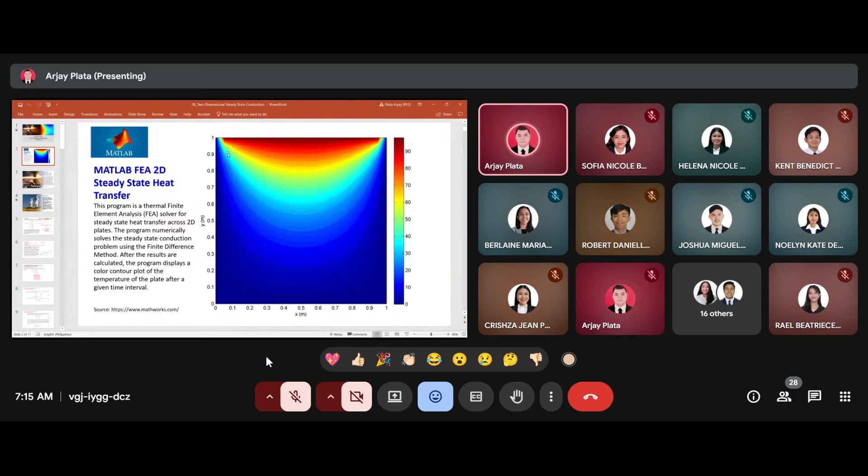Same as earlier, so this is the kind of output MATLAB gives us. We have the X direction and also the Y direction. This is the temperature profile from 0 going to 90.

Does anyone have an account on MATLAB? I mean, do you have an account on MATLAB? It seems our license has been renewed, so you can use MATLAB using your GSOT account.

You can use the finite difference method in solving conduction heat transfer problems. So this is the output we get with regards to the temperature profile.

Another way is through ANSYS. Usually we use ANSYS for transient conduction using ANSYS Mechanical.

As we all know, time plays an important role in heat transfer. Any heat transfer phenomenon takes some time to reach a steady state. As I mentioned previously, in reality at the beginning it is not really steady state, the heat transfer is still fluctuating. Then as time goes by, it becomes steady state.

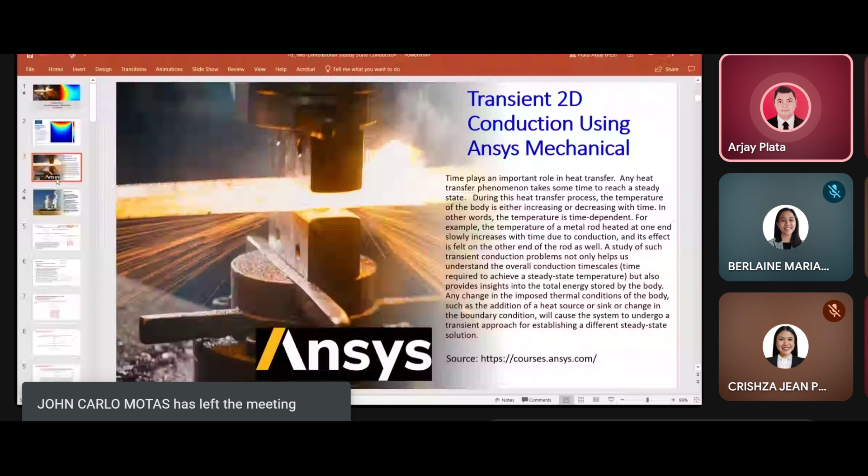And so you can use ANSYS Mechanical, it's also available online. So I just introduced some of the softwares that we can use in solving a two-dimensional conduction problem.

So for today, our objective will be: first, to review alternative approaches to determining temperatures and heat rates in a two-dimensional steady-state conduction; to consider some of the mathematical issues associated with obtaining an exact solution; and to show how, with the aid of a computer, numerical finite difference or finite element methods may be used to accurately predict temperatures and heat rates within the medium and at its boundaries.

Okay, so that is our goal for today.

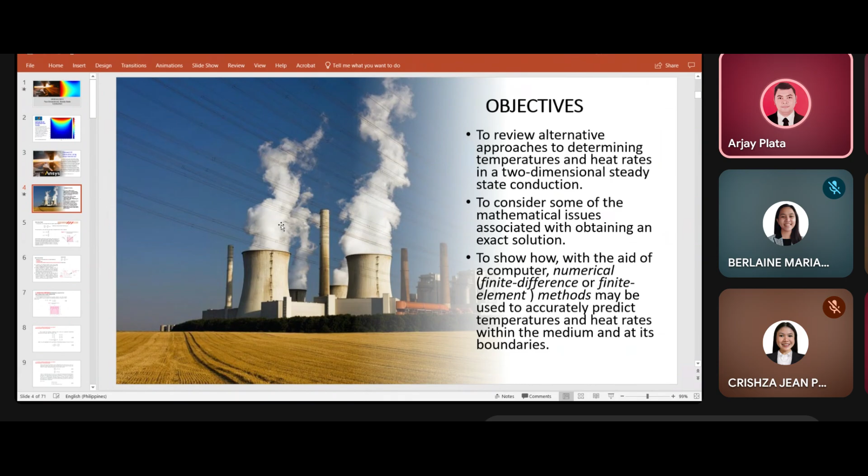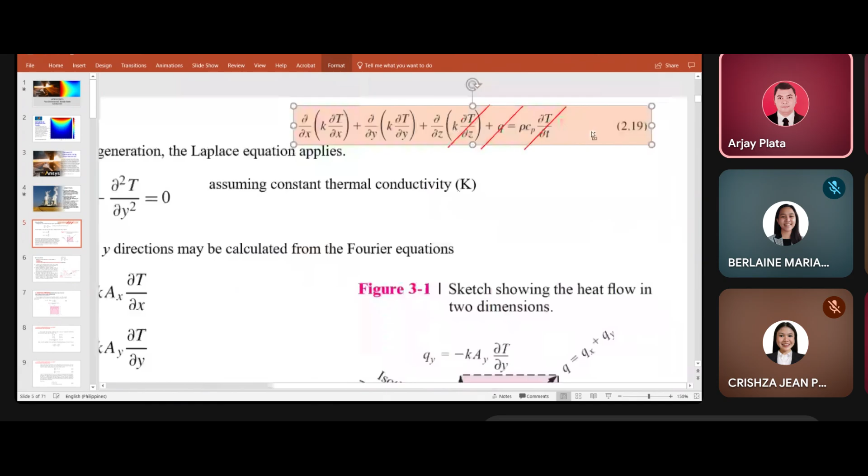In a two-dimensional case, as I've said, we have two directions, the X and the Y, so we have no Z direction. By the way, what you see on the screen is our diffusion equation that we previously derived. As you can see here, we have no Z, so we delete the Z direction. We have heat generation and

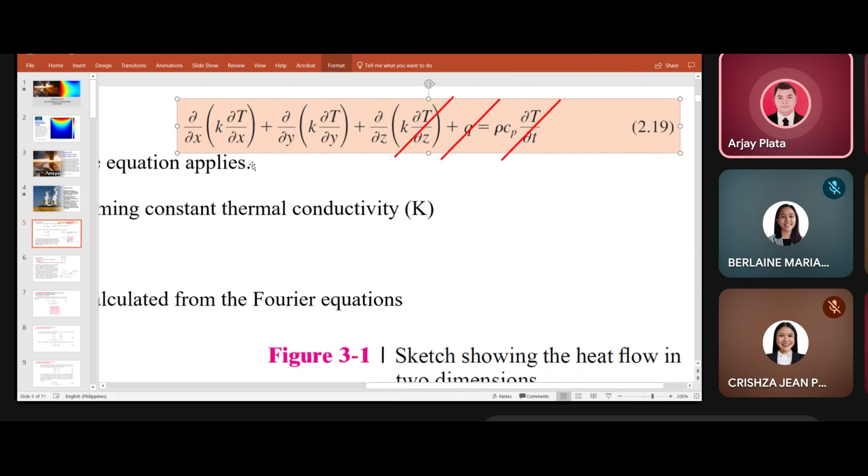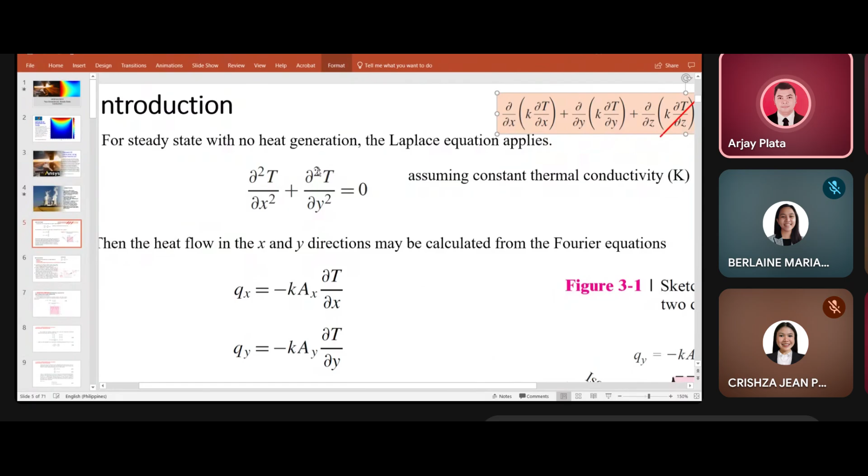energy stored, so what we only have is conduction in the X and Y directions. So our resulting equation is a Laplace equation that applies, assuming constant thermal conductivity K: partial squared T over partial X squared plus partial squared T over partial Y squared equals 0. This is our working equation.

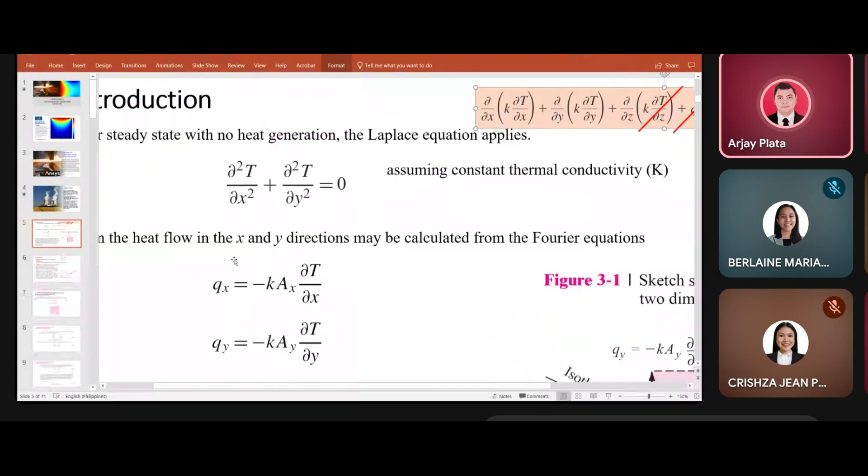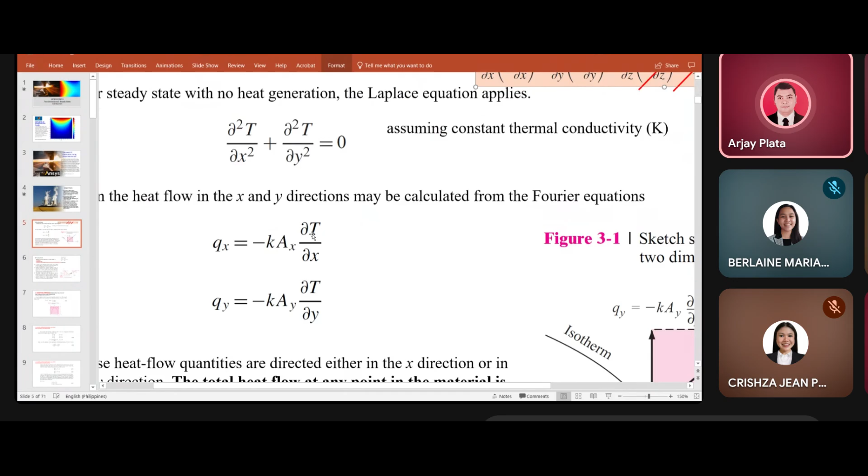Then the heat flow in the x and y directions may be calculated from Fourier's equation. We have Qx equals negative K times A times the partial derivative of T with respect to x, and negative K times A times the partial derivative of T with respect to y. So that's using Fourier's equation, this is our resulting equation for heat flow.

This is our sketch showing the heat flow in two dimensions. We have Qx in the x direction, equal to negative KA times the partial derivative of T with respect to x. Similarly, we have negative KA times the partial derivative of T with respect to y. To solve for the total heat flow, we get the resultant, which is Q equals Qx plus Qy. This is our resultant, so this becomes the total heat flow rate, or heat transfer, Qx plus Qy.

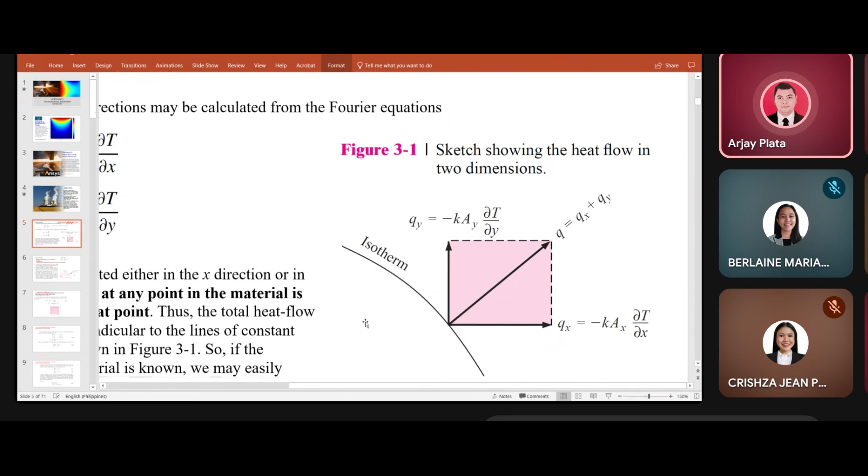Okay, so the heat flow quantities are directed either in the x direction or the y direction. The total heat flow at any point in the material is the resultant of Qx and Qy at that point. Thus, the total heat flow vector is directed so that it is perpendicular to the lines of constant temperature in the material, as shown in the figure. So if the temperature distribution in the material is known, we may easily establish the heat flow.

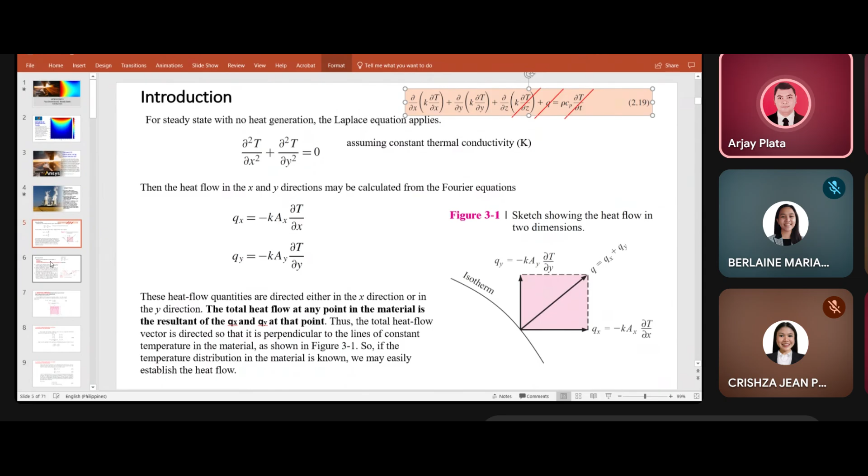So in solving for the two-dimensional problems, we have three ways. The first way is through analytical methods, where we solve through equations. The second way is graphical, which is easier to solve, however it's less accurate because we graph it manually. And the last one is numerical, or finite difference, finite element, or boundary element approaches.

In contrast, analytical methods provide exact results at any point, while graphical and numerical methods can only provide approximate results at discrete points. Although superseded by computer solutions based on numerical procedures, the graphical or flux plotting method may be used to obtain a quick estimate of the temperature distribution. Its use is restricted to two-dimensional problems involving adiabatic and isothermal boundaries.

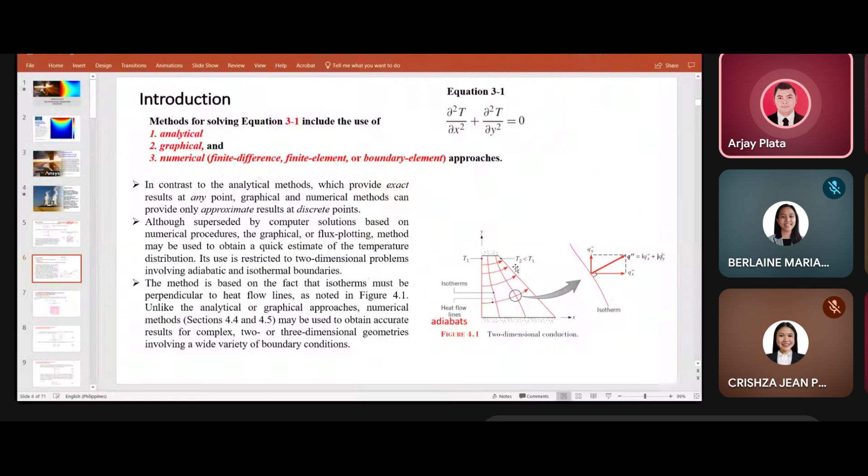So by the way, let's sketch this. Let's say this is our figure. From T1, heat is transferred going to T2, since T2 is less than T1. So this is our heat flow direction. Since we are dealing with X and Y, let's take a small portion here.

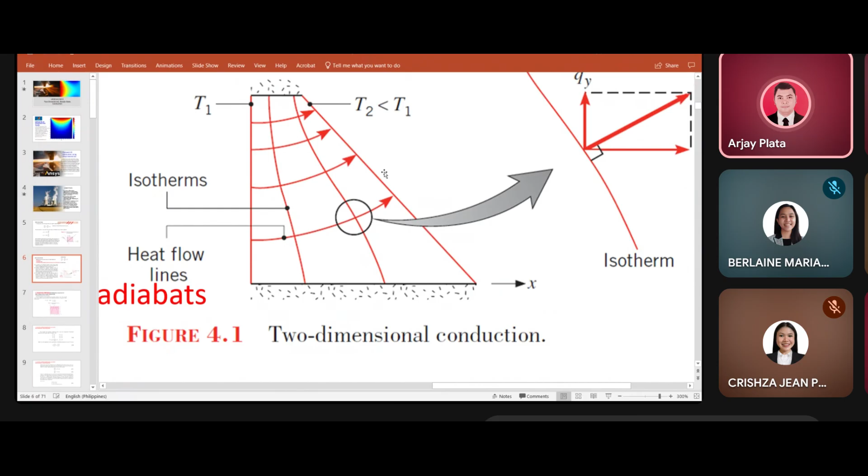So it looks like this. At every point, we have the X and Y direction. So we have heat transfer at the X direction and heat transfer at the Y direction, and they are perpendicular - we have a right angle here.

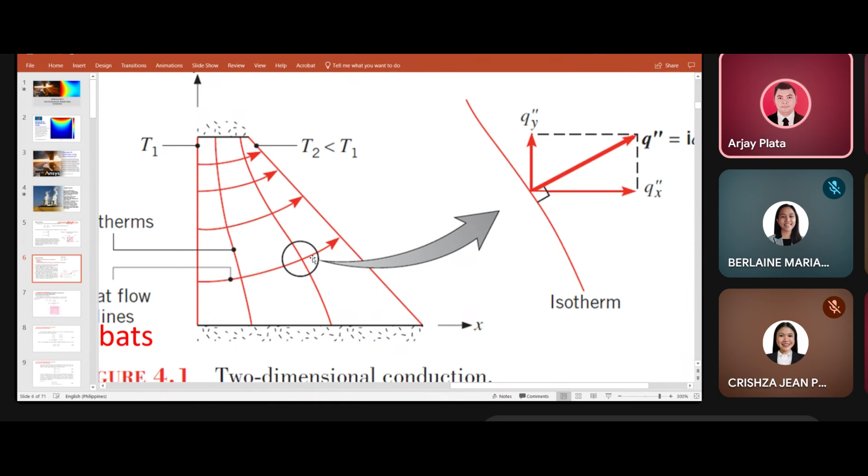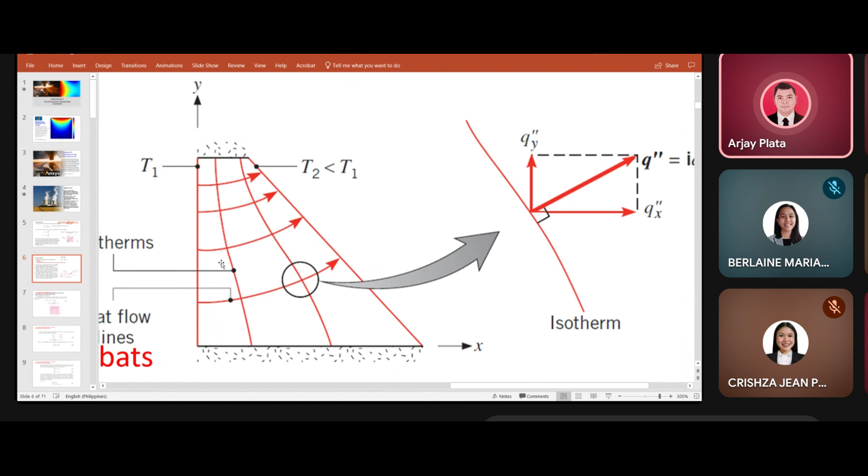Again, this is the X direction, and this is the Y direction. The lines across the Y direction, parallel to the Y direction, are called isotherms. That's what we call them - isotherms.

The analytical method is a bit complicated. Here we will use separation of variables. So here we have our figure, with the width or height as X and Y. This shows the isotherms and heat flow lines in a rectangular plate - these are the isotherms, and these are the adiabats or heat flow lines. We have a right angle here.

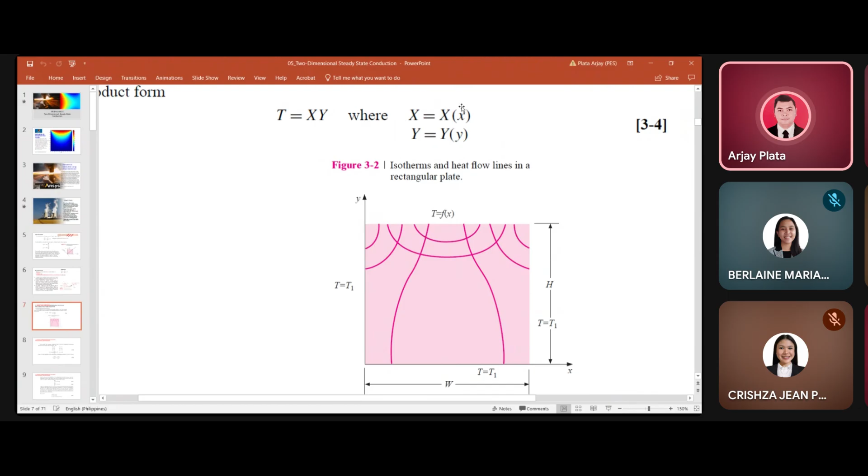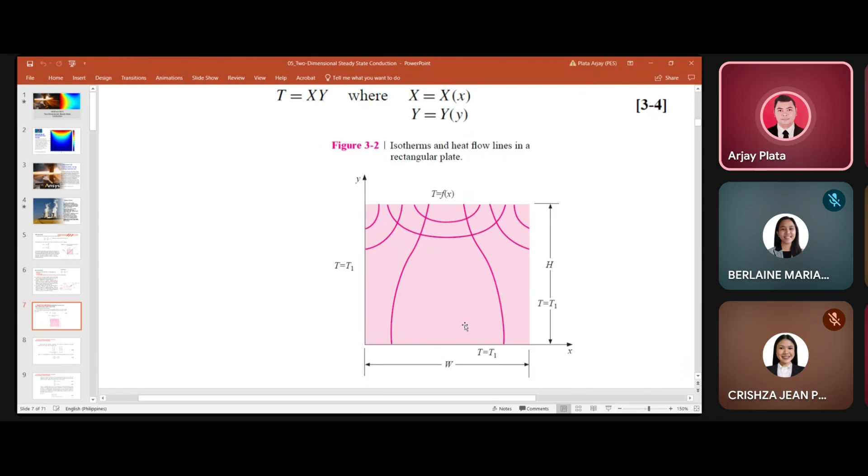So let's try this, where T equals X times Y, where X equals X of X and Y equals Y of Y. As you can see, it's symmetric - symmetrical, so T here equals T1, same on the other side, that value. So it's symmetrical here for T.

First we will consider the boundary conditions with the sine wave temperature distribution. We have T equals T1 at Y equals 0, as you can see here. Okay, and this is Y equals 0, so our temperature there is T1. So T equals T1 at X equals 0, as you can see here, so here X equals 0, so our temperature is T1. And then at X equals W, T is T1 as well, as you can see here - X equals W, so T equals T1.

At Y equals H, here we arrive at an equation. So we have at Y equals H - this is H - so this is our T equals f of X. So our equation here is T equals Tm sine (pi x over W) plus T1, at Y equals H. This is our sine wave temperature distribution equation.

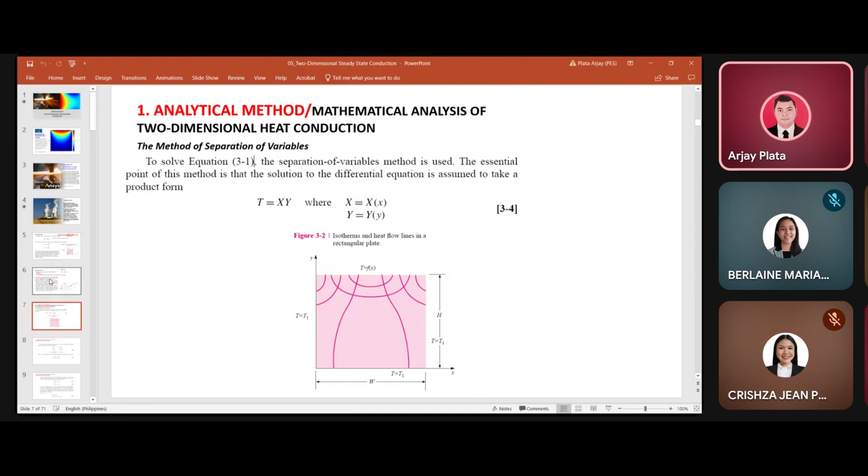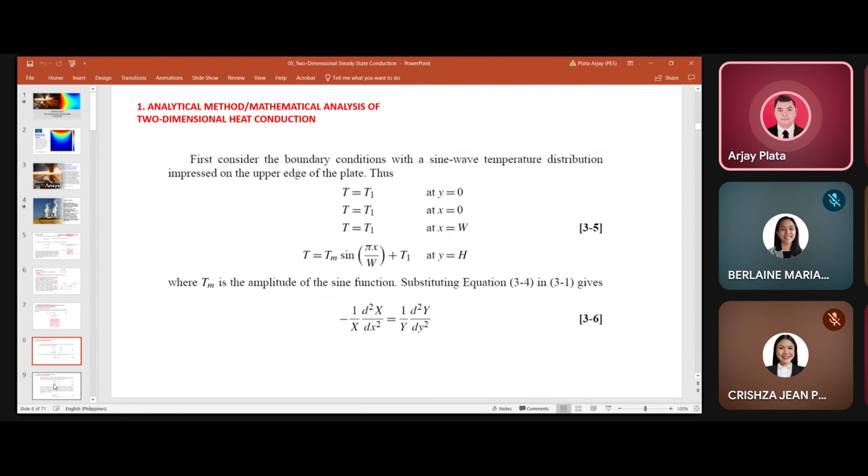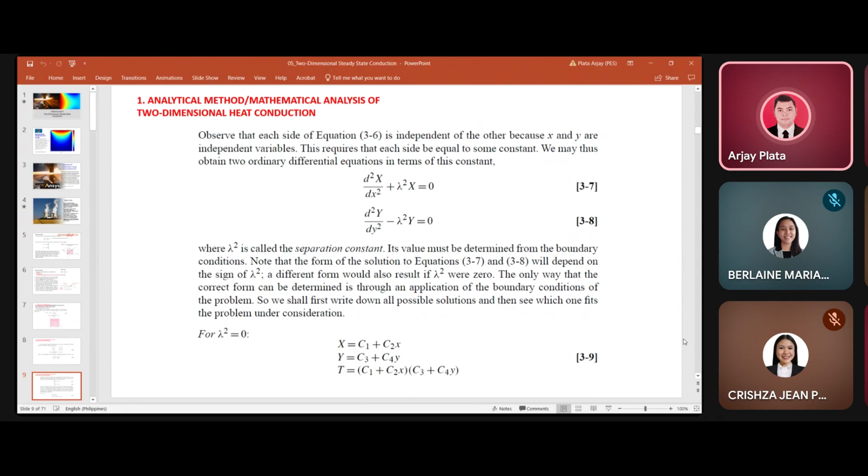Where Tm is the amplitude of the sine function. Substituting equation 3-4 into 3-1, we substitute equation 3-4 into equation 3-1, and we will get this: negative 1 over X, d-squared X over dx-squared, equals 1 over Y, d-squared Y over dy-squared. So this equation is a bit complicated, since here we use separation of variables.

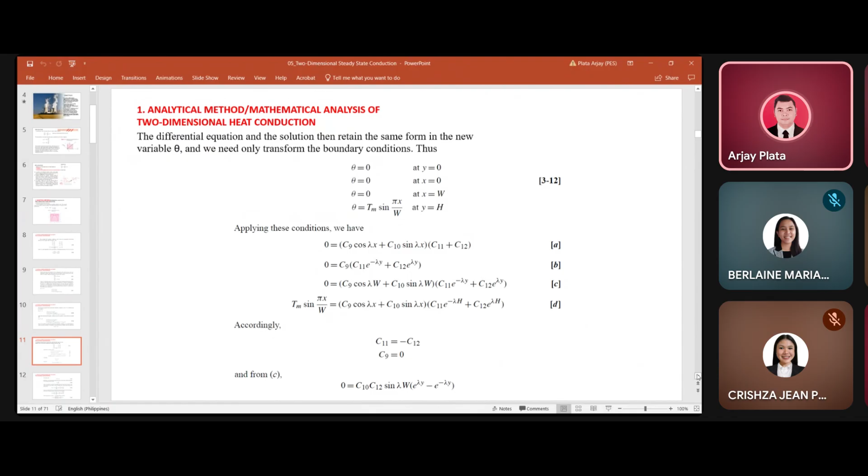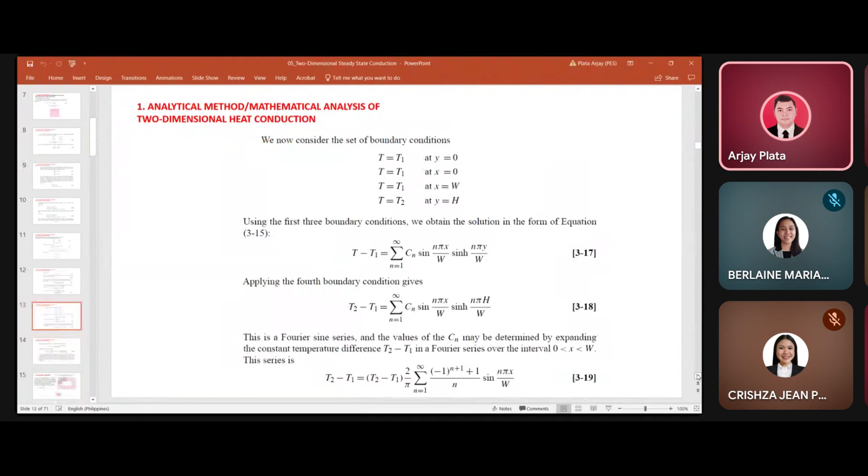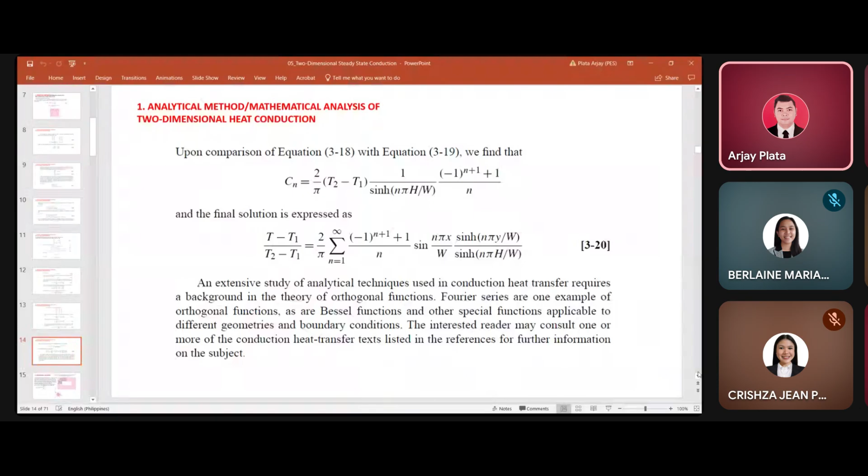So it's complicated, right? But there's a shorter way to solve two-dimensional problems. This is the derivation up to equation 3-20, which is still quite complicated. So later I'll teach you the simpler way of solving the analytical method using different figures.

So case 1 up to case 15, you don't have to memorize it since it's already in the table in your module. So bring that during the exam for your convenience.

Pero dapat alam nyo kung saan case kayo, kung saan case yung applicable. So we have 15 cases here.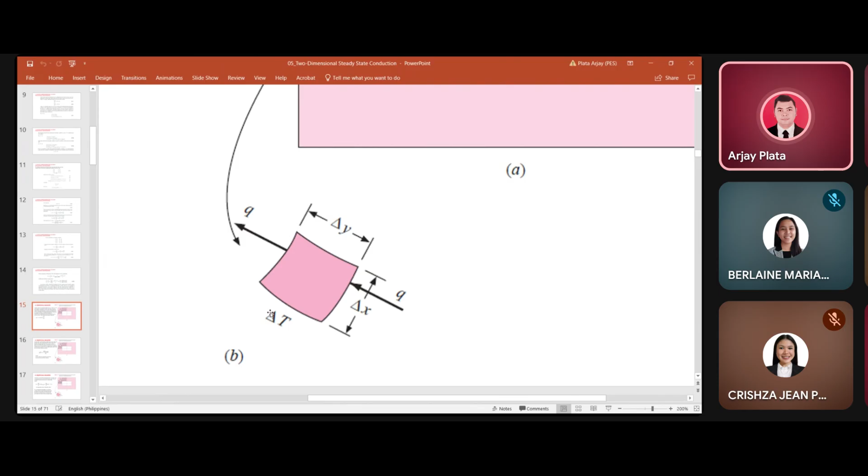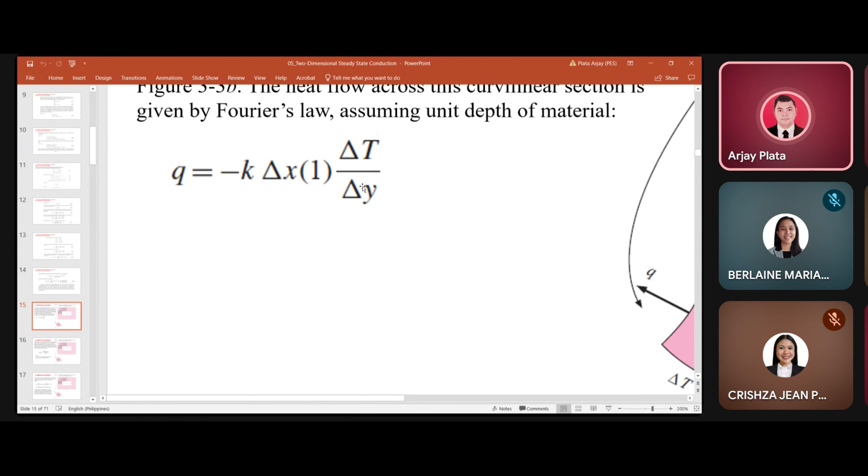Ayun na dito, we have x1, okay, so kuha tayo ng maliit na portion. So we have here, ito yung rate ng, ito yung heat transfer natin, yung Q. I-expand lang natin or tanggalin natin yung over 2 by multiplying both sides. Yan, so we have delta y, tsaka delta x. Ito yung delta T natin. So we have here Q equals K delta x times delta T over delta y. Delta x times 1.

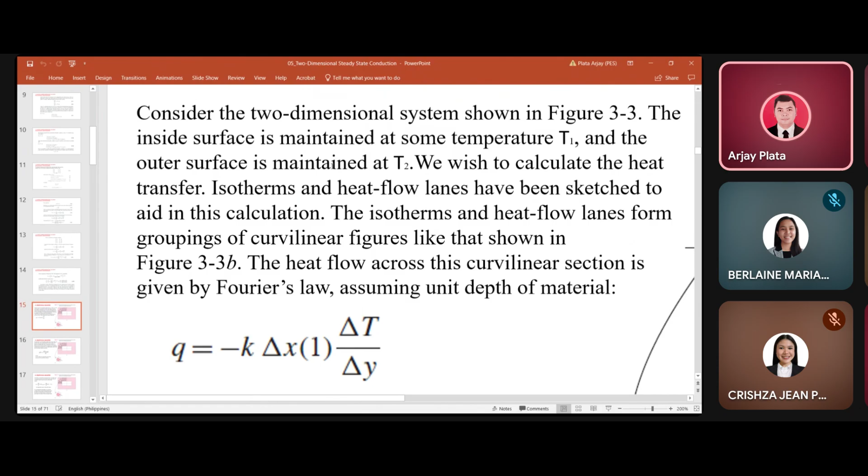So Fourier's law yung gagamitin natin. Isotherms and heat flow lanes have been sketched to aid in this calculation. The isotherms and heat flow lanes form groupings of curvilinear figures like that shown in figures 3-3b. So the heat flow across this curvilinear section is given by the Fourier's law, assuming unit depth of materials. Yung assume natin na unit depth ay 1. So we have ang area natin dyan ay delta x times yung depth na 1. Kaya meron tayong K, A, area, delta T over delta y. Yan yung equation natin, no?

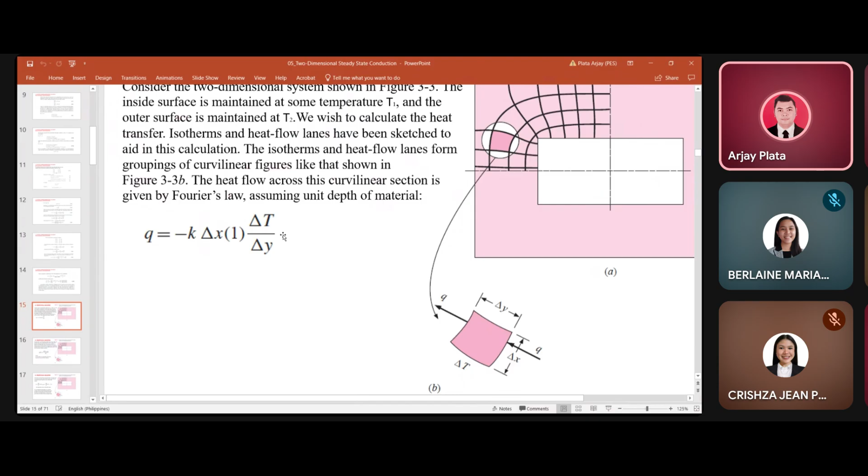So the heat flow will be the same through each section within this heat flow lane, and total heat flow will be the sum of the heat flows through all the lanes. So if the sketch is drawn so that delta x equals delta y, the heat flow is proportional to delta T across the element. And since heat flow is constant, delta T across each element must be the same within the same heat flow lanes.

Thus, the delta T across an element is given by K. Ito yung formula natin ng pagkuha ng delta T. So delta T, ito yung delta T natin, equals delta T overall over N. Yung N is number of temperature increments between inner and outer surfaces.

Let's try this one. Sample number 2.

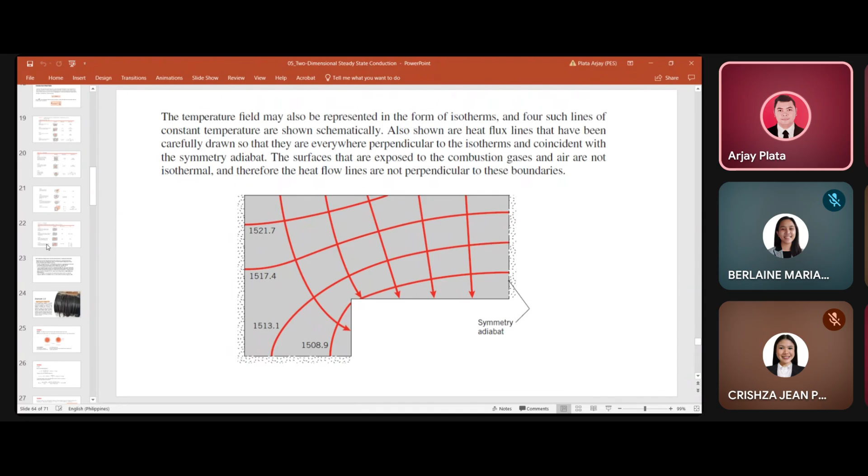Ayan. So, ganyan yung graphical. May question kayo sa graphical? Hanap tayo dito ng example sa graphical.

So ang gagawin natin sa graphical, kunyari meron kayong figure, better divide nyo muna siya, halimbawa ganito yung figure nyo, square. Divide nyo lang muna siya sa quadrant, tapos sa quadrant na yun doon kayo magkaroon ng divisions. So in case meron given na number ng heat flow lanes, pwede kayo yung maghati. Dapat equally divided yung ating heat flow lanes tsaka yung ating isotherms, dapat perpendicular siya.

Although it is a very inaccurate way of solving the heat transfer, care must be taken to construct the plot so that delta x equals delta y and the lines are perpendicular. So here it is our example.

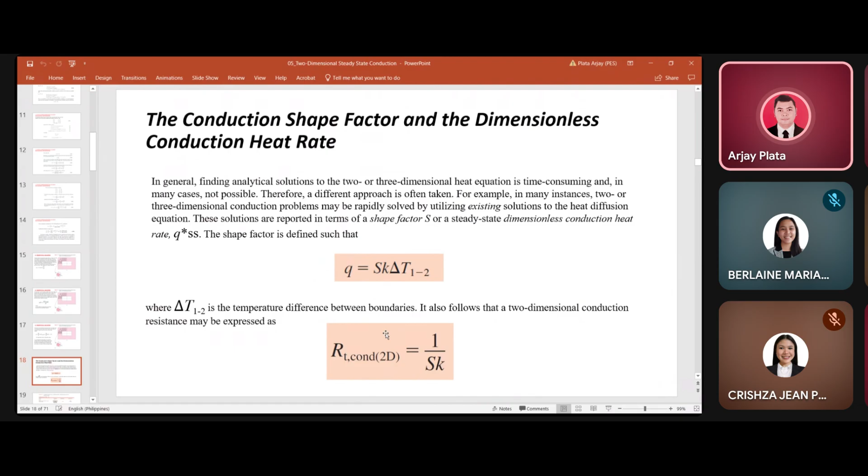So it also follows that a two-dimensional conduction resistance may be expressed as R conduction for two-dimensional. So yan yung ating formula, 1 over SK, kung ang pinapahanap ay thermal resistance. So ito yung formula natin, 1 over SK. Yung S, again, based siya dito sa table.

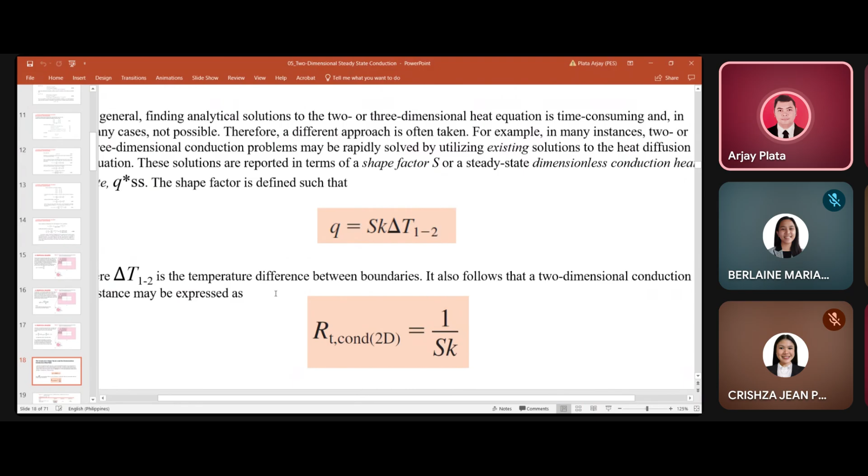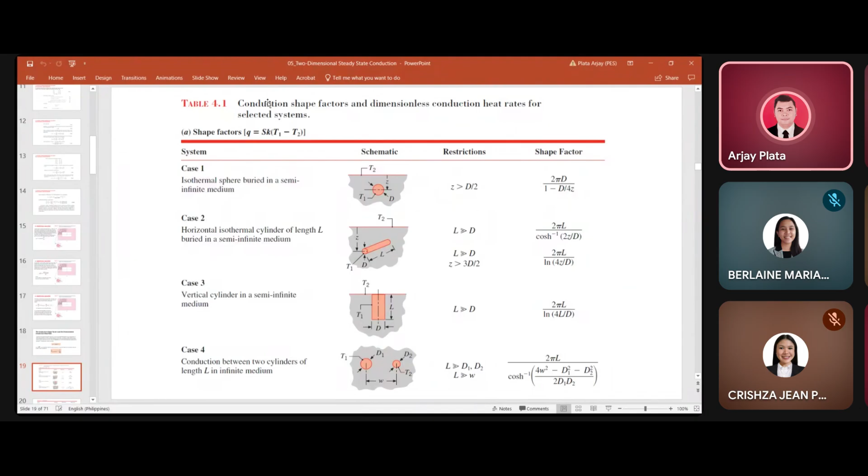So ito na yung table, conduction shape factor ang tawag natin dun sa S. Conduction shape factors in dimensionless conduction heat rates for selected systems. So ito yung formula, Q equals SK delta T.

Ito yung formula, so unang case ay isothermal sphere buried in semi-infinite medium. Okay, ito yung case 1. Meron daw tayong isothermal sphere, sphere na nakalubog sa semi-infinite medium. Yung semi-infinite medium ay either fluid o pwedeng solid, basta naka-buried yung sphere dito sa semi-infinite medium.

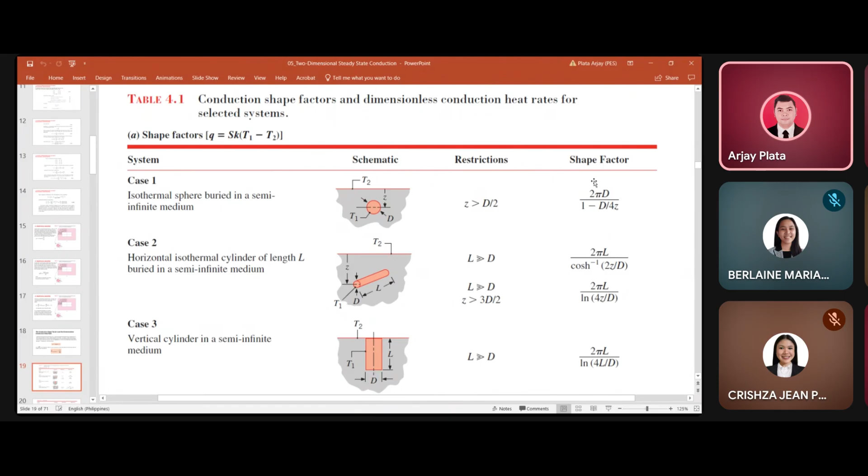Pero kung halimbawa nila na mag-aagree sa kanilang answer na ganito, which is nakikita sa case 2, wala naman yung problem. So we have horizontal isothermal cylinder of length L, naka-buried din siya sa semi-infinite medium. Ang pinakaiba nitong dalawa, itong isa is sphere, ito naman ay cylinder.

So ang ating equation, if L is greater than D, we have 2 pi L over cosh to the negative 1 of 2z over d. So if z is greater than 3d over 2, may case na ganito: ito yung gagamitin nyo, 2 pi L over ln of 4z over d. Pero kung yung z naman is less than 3d over 2, dito lang kayo sa unang equation. Ito yung shape factor na gagamitin nyo, yun yung multiplier natin dito sa heat transfer equation.

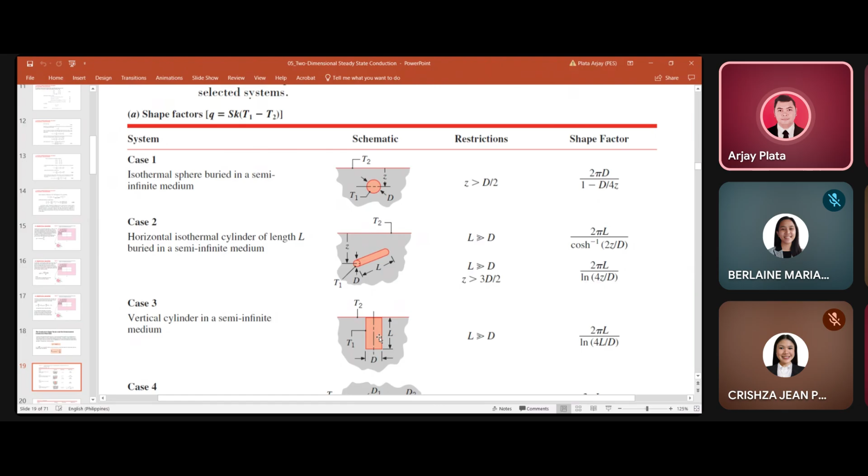Okay, so case 3 is vertical cylinder in semi-infinite medium, where L is greater than D. So ito yung ating magiging equation: we have 2 pi L over ln of 4L over D.

Case 4 is conduction between two cylinders. Ganito yung tsura niya, dalawang cylinders of length L in infinite medium. So if L is greater than D1, D2, or if L is also greater than W, ito yung equation.

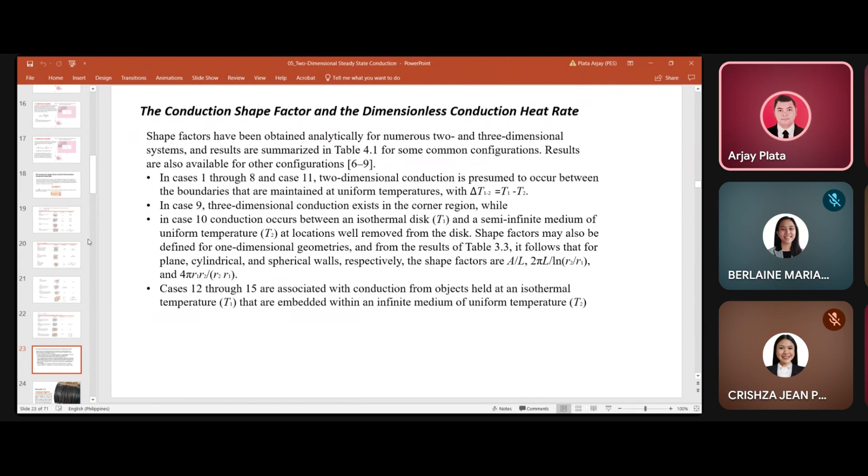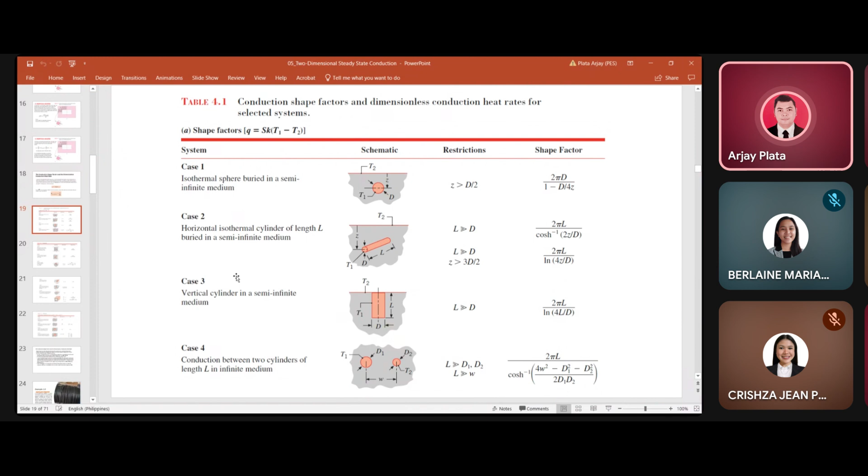So for you to be able to be familiar with the table, let us have some examples.

Example 1: a metallic electrical wire of diameter D equals 5 mm is to be coated with insulation of thermal conductivity K equals 0.35 watt per meter Kelvin. It is expected that for the typical installation, the coated wire will be exposed to conditions for which the total coefficient associated with convection and radiation is H equals 15 watt per square meter Kelvin. To minimize the temperature rise of the wire due to ohmic heating, the insulation thickness is specified so that the critical insulation radius is achieved. During the wire coating process, however, the insulation thickness sometimes varies around the periphery of the wire, resulting in eccentricity of the wire relative to the coating. Determine the change in thermal resistance of the insulation due to an eccentricity that is 50% of the critical insulation thickness.

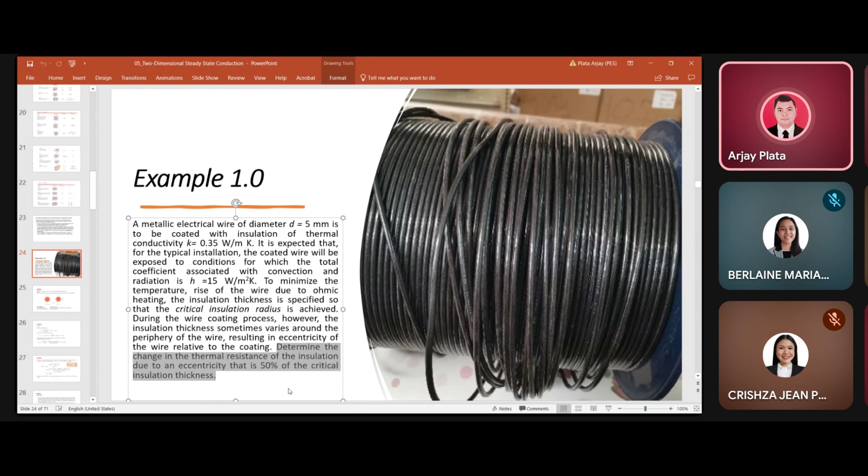Kukompare natin siya sa thermal resistance ng eccentric, which is, may makukuha din tayo. Ito yung value ng thermal resistance ng eccentric, 1 over SK. So i-compare natin siya dito sa 1 over SK. Kasi ang hinahanap sa problem is determine the change in thermal resistance of the insulation due to eccentricity, that is 50% of critical insulation thickness. Thermal resistance yung pinapahanap, kailangan makuha natin yung thermal resistance ng perfectly na pagkakalagay ng insulation versus dun sa hindi masyadong center.

Yan, ito yung formula na tinuro ko before sa thermal resistance ng cylinder, which is ln of R2 over R1 over 2 pi K. So, substitute natin ln of R. Ang radius natin is 23 mm over yung D over 2 natin, or yung R natin ay sa wire, which is 5 mm over 2, over 2 pi times yung value ng K na given sa problem. So, we have 1.0 meter Kelvin per watt.

Ito yung concentric. So, compute naman natin yung eccentric. For the eccentric wire, the thermal resistance of the insulation may be evaluated using case 7, where the eccentricity Z equals 0.5 times critical radius equals 0.5 times 21, which is 10 mm. Yun yung eccentricity nila, meaning wala siya sa gitna. Itong Z natin, ito yung eccentricity, which is 10 mm.

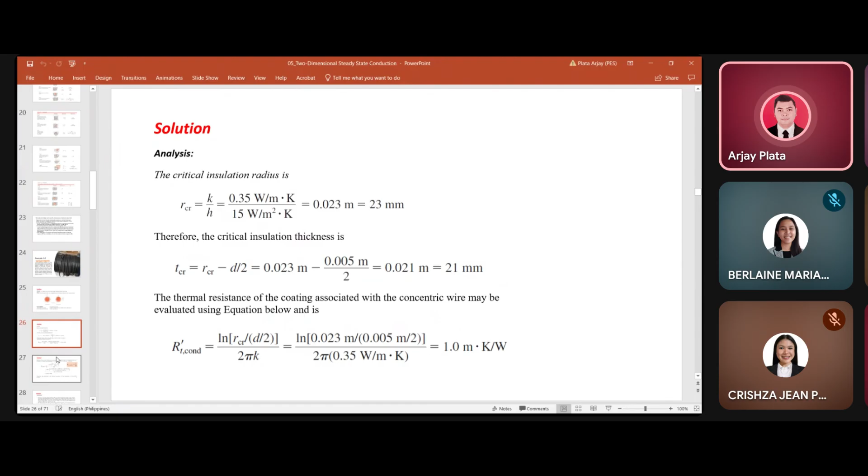So therefore, the reduction in thermal resistance of the insulation is 0.09 meter Kelvin per watt. Kanina, ang value ng concentric ay 1.0 meter Kelvin per watt. Ngayon, yung naging eccentric na siya, 0.91 na lang. Ibig sabihin, nabawasan yung thermal resistance kasi mas manipis dito sa part na ito. Ibig sabihin, bababa yung thermal resistance dito. Nabawasan siya ng 10%. Kaya importante na sa paglalagay ng mga insulation, dapat concentric siya as much as possible para maiwasan natin yung heat loss sa surroundings.

Do you have any question? Nagets ba?

Pwede nyo lagay sa comments: reduction in local insulation thickness leads to smaller local thermal resistance of the insulation. Conversely, locations associated with thicker coatings have increased local thermal resistances. These effects offset each other but not exactly. The maximum resistance is associated with the concentric wire case. For this application, eccentricity of the wire relative to the coating provides enhanced thermal performance relative to the concentric wire case.

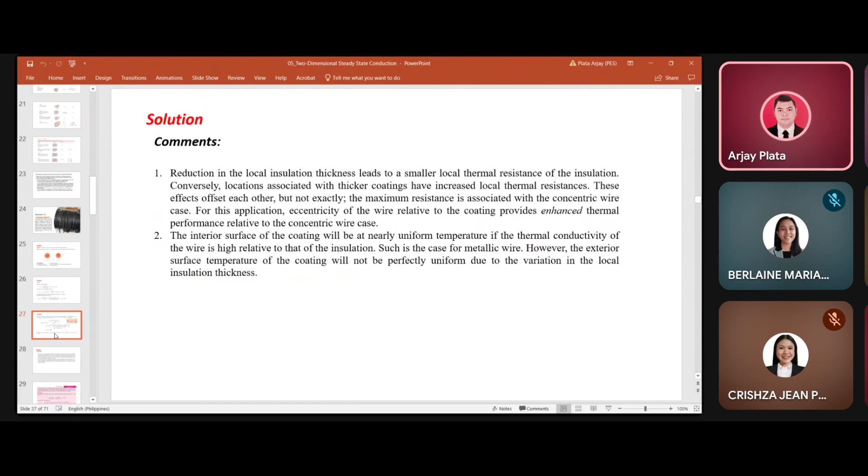Okay. Yun. Gamit lang kayo ng table sa pag-compute.

Another example is the buried pipe. A horizontal pipe 15 cm in diameter and 4 meter long is buried in the earth at a depth of 20 centimeters. The pipe wall temperature is 75 degrees Celsius and the earth's surface temperature is 5 degrees Celsius. Assuming that the thermal conductivity of the earth is 0.8 watt per meter degree Celsius, calculate heat loss by the pipe.

We may calculate the shape factor for this situation using the equation in table 4.1. Alin yung ginamit na case dito sa pipe buried in solid? Parang case 1, no? Ay, hindi, sphere pala yung case 1. So case 2: horizontal isothermal cylinder of length, buried in semi-infinite medium. Check natin kung case 2 yung ginamit. Tama.